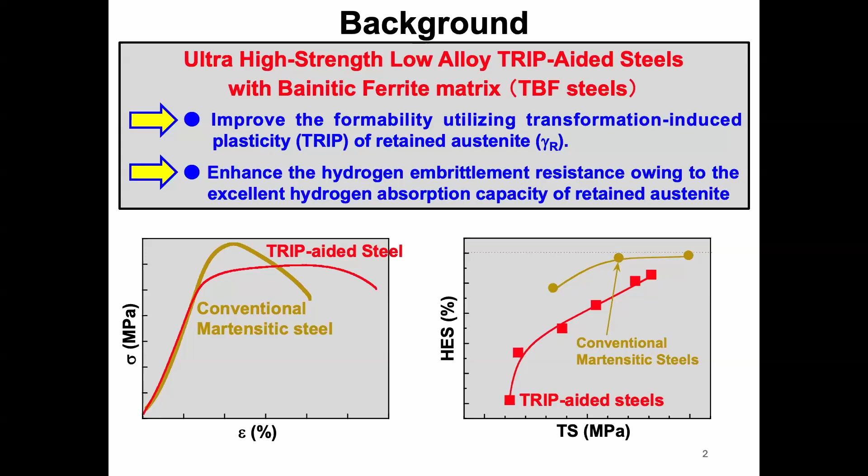To further improve the hydrogen embrittlement resistance of ultra-high strength low-alloy TRIP-aided steels, it is expected to add alloying elements to the TRIP-aided steel to refine the microstructure, to enhance the hardenability, and to precipitate carbides acting as hydrogen trapping sites. Also, addition of alloying elements is expected to improve the retained austenite characteristics of the TRIP-aided steels owing to the transformation-induced plasticity effect and absorption of hydrogen.

About the previous report, in the TRIP-aided martensitic steels, TM steels, microalloyed TM steels decrease the hydrogen embrittlement susceptibility. So it is expected that the hydrogen embrittlement resistance may be enhanced by the partial replacement of martensite with bainitic ferrite, because bainite or bainitic ferrite possesses excellent resistance to hydrogen embrittlement.

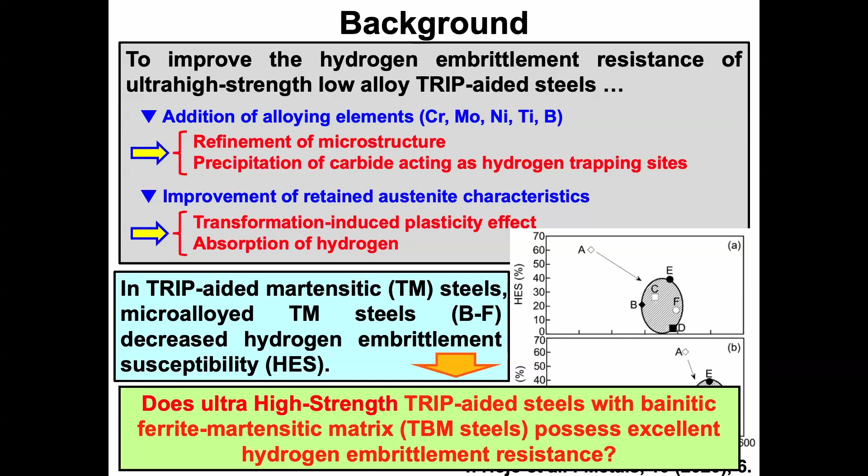So in this study, to develop ultra-high strength automotive frame parts with tensile strength of more than 1180 megapascal, the effect of alloying elements on hydrogen embrittlement properties of ultra-high strength TRIP-aided bainitic ferrite martensite, TBM, steels is investigated.

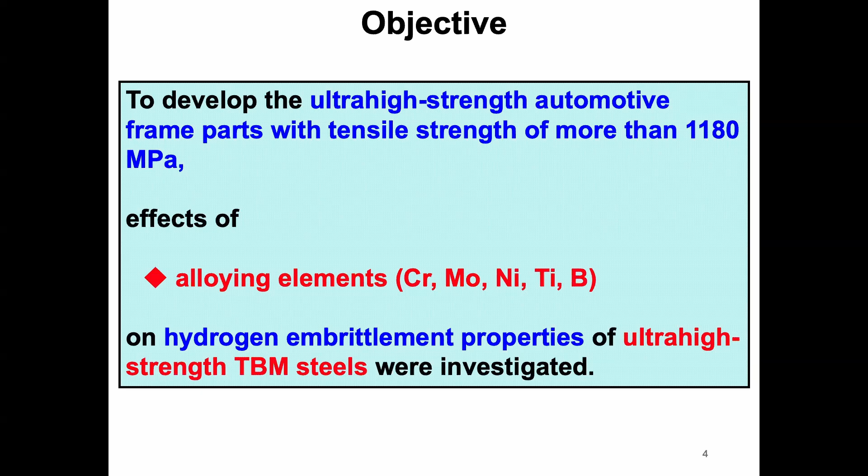Next, I'm going to describe the experimental procedure. In this study, 6 kinds of steels with chemical compositions as shown in this table are used. Steel A was the base steel, and titanium, boron, chromium, chromium-molybdenum, and nickel-chromium-molybdenum were added to steels B to F.

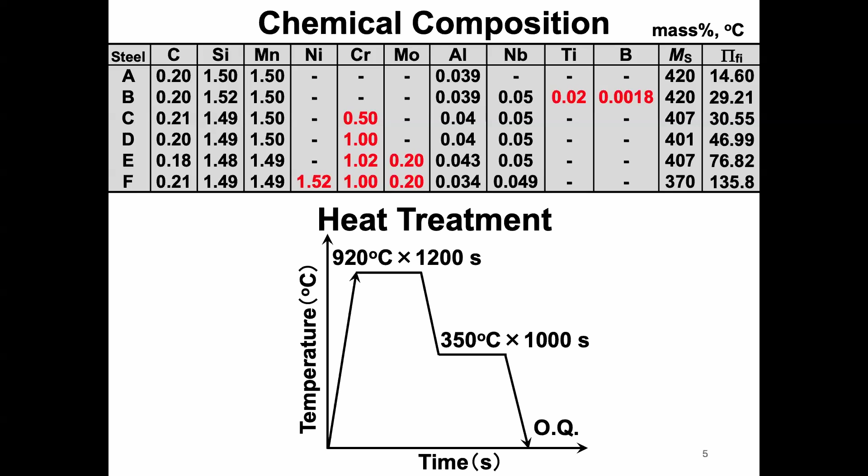Heat treatment was conducted by annealing at 920 degrees Celsius for 1200 seconds, followed by isothermal transformation treatment at 350 degrees Celsius for 1000 seconds to produce a TBM steel. Tensile tests are conducted using a tensile specimen with dimensions of 15 millimeter in gauge length, 6 millimeter in width, and 1.2 millimeter in thickness at a strain rate of 8.33 × 10^-4 per second.

Hydrogen embrittlement properties are evaluated by the hydrogen embrittlement susceptibility, HES, using this equation, in which epsilon 0 and epsilon 1 denote total elongation without and with hydrogen. The hydrogen charging was conducted by means of cathodic charging using a solution containing 3% sodium chloride and 3 gram per liter ammonium thiocyanate at a current density of 10 ampere per square meter at 25 degrees Celsius for 48 hours before the tensile test.

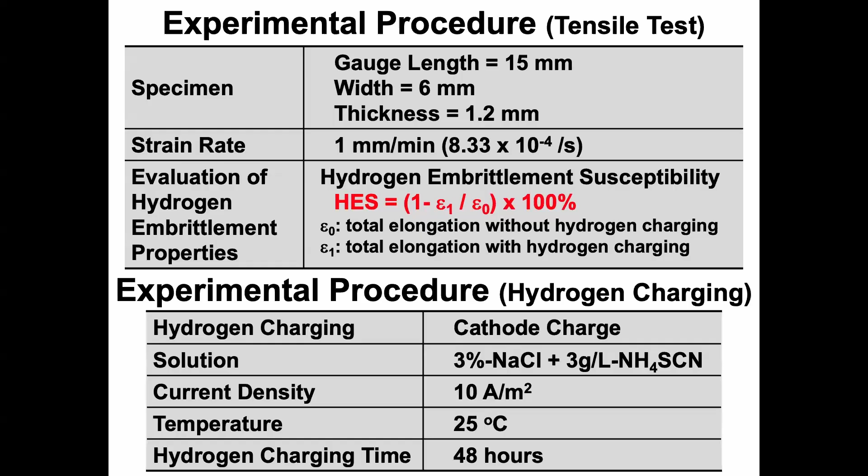Next, I'm going to show you the results. This figure shows the microstructure of TBM steels. The microstructure of steel A consisted of a bainitic ferrite and martensite matrix with a grain diameter of approximately 20 micrometer and retained austenite. On the other hand, in the microalloyed TBM steels, a fine bainitic ferrite and martensite matrix was observed. Although we could not distinguish the bainitic ferrite and martensite, the amount of martensite increased by the addition of alloying elements.

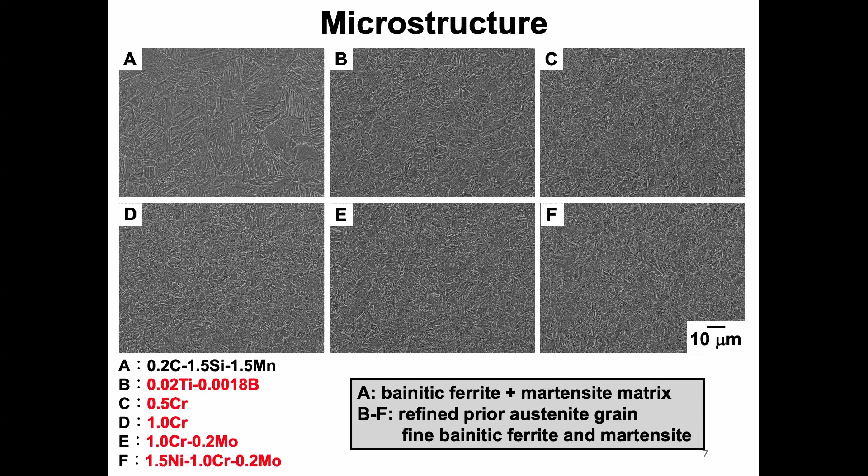This figure shows the tensile properties and retained austenite characteristics of the TBM steels. The tensile strength increased, whereas total elongation slightly decreased by the addition of alloying elements. Volume fraction of retained austenite increased, and its carbon concentration decreased in steels D, E, and F.

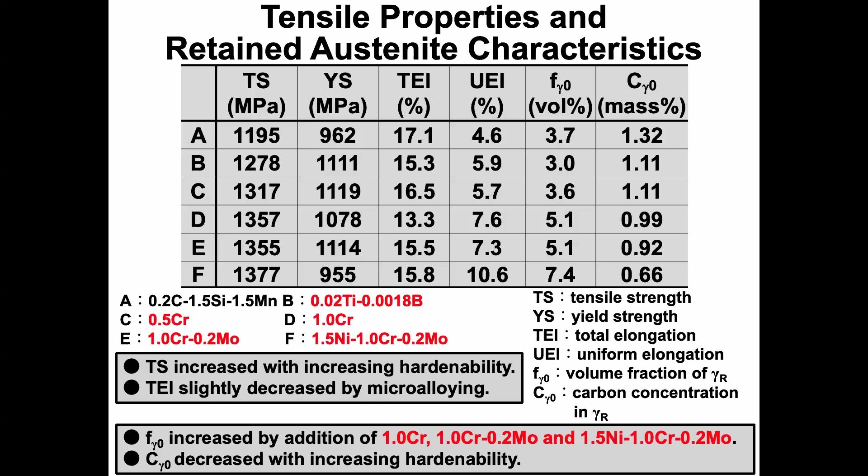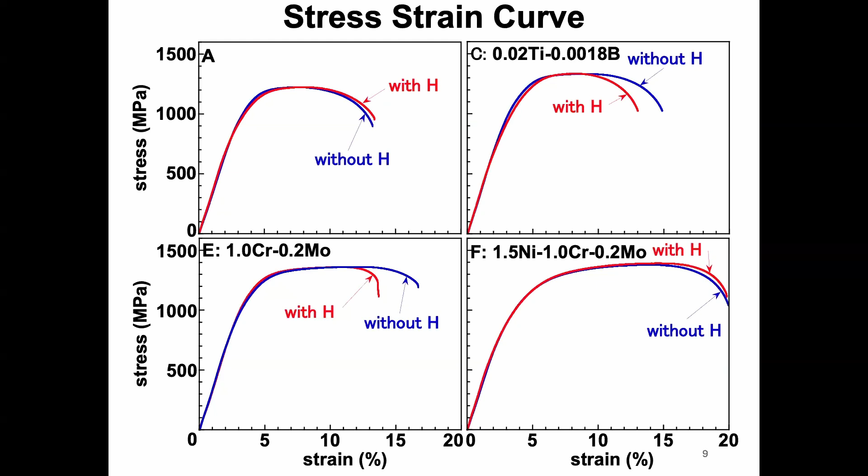This figure shows the relationship between hydrogen embrittlement susceptibility, HES, and tensile strength, yield strength, and elastic limit. The hydrogen embrittlement susceptibility increased by the addition of alloying elements, and HES increases with increasing tensile strength and elastic limit. In addition, HES significantly increased when yield strength exceeded 1100 megapascal.

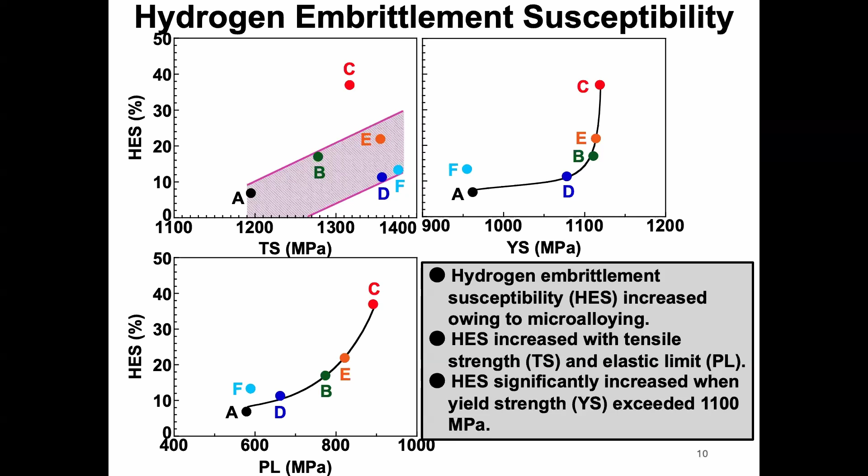These figures show the hydrogen desorption curves and the relationship between hydrogen concentration and volume fraction of retained austenite in the TBM steels. The hydrogen concentrations calculated from the hydrogen desorption curves are also shown in the table. The hydrogen was desorbed at temperatures between room temperature and around 150 degrees Celsius, and the peak temperature was approximately 50 degrees Celsius. Alloying element addition increased the peak temperature, and a high amount of desorbed hydrogen was observed in the TBM steels with alloying elements.

From the right-hand side graph, we can see that hydrogen concentration increased with increasing volume fraction of retained austenite. This result suggests that a large amount of hydrogen is trapped in or around retained austenite.

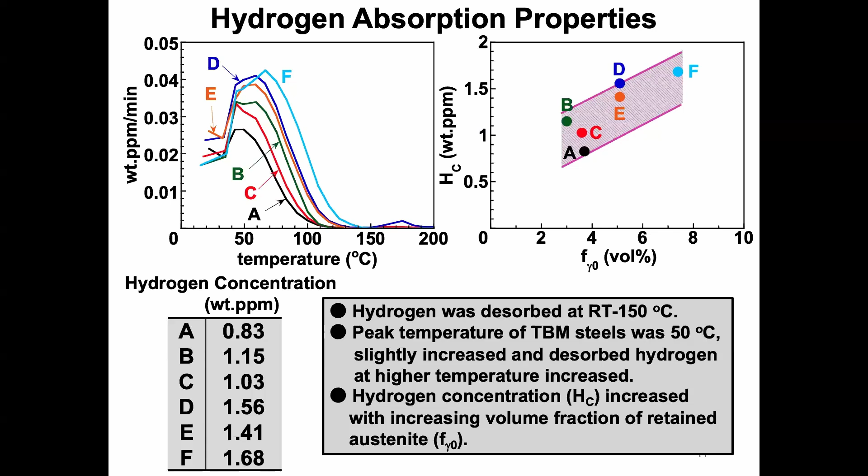Next, these figures show the relationship between hydrogen embrittlement susceptibility and retained austenite characteristics, such as volume fraction of retained austenite, carbon concentration in retained austenite, and total carbon content in retained austenite. You can see that HES decreased with increasing carbon concentration in retained austenite. However, significant tendencies are not observed in the volume fraction of retained austenite and the total carbon content in retained austenite.

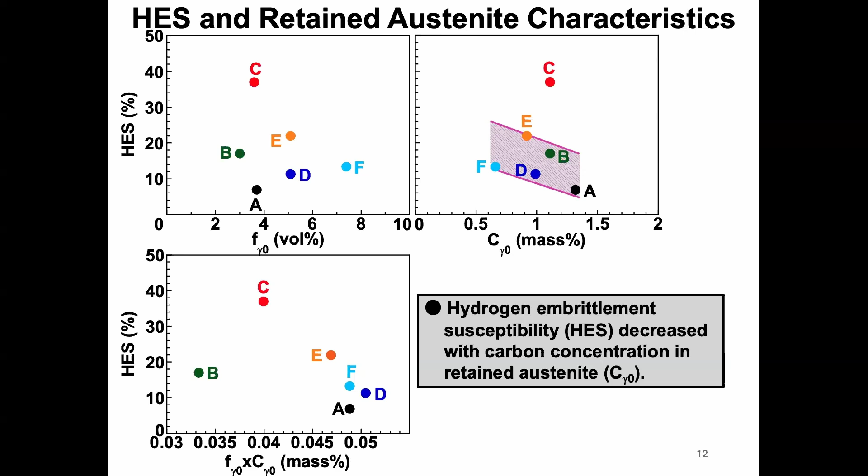Carbon concentration corresponds to the stability of retained austenite. Therefore, high carbon concentration gives high stability of retained austenite, and retained austenite transforms to martensite in the later stage of the tensile test. In our previous report, when the tensile test was conducted with hydrogen, the retained austenite transformed to martensite, and the crack initiated at the transformed martensite. Therefore, crack initiation and propagation was accelerated in the TRIP-aided steels if transformation of retained austenite occurred. Therefore, hydrogen embrittlement resistance of TRIP-aided steel decreased.

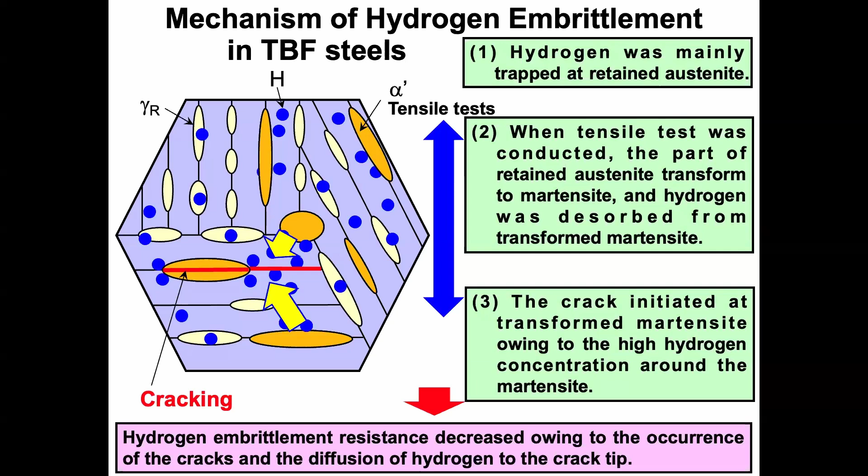The factors affecting hydrogen embrittlement resistance in TRIP-aided steels were strength, microstructure, hydrogen concentration, and stability of retained austenite. In the microalloyed TBM steels, microstructure was refined and volume fraction of retained austenite increased. These factors decrease hydrogen embrittlement susceptibility. However, the strength increased, carbon concentration decreased, and hydrogen concentration increased in the microalloyed TBM steels. These factors increase hydrogen embrittlement susceptibility of the TBM steels. Therefore, these factors simultaneously affect the hydrogen embrittlement susceptibility, and the hydrogen embrittlement susceptibility of the microalloyed TBM steels slightly increased.

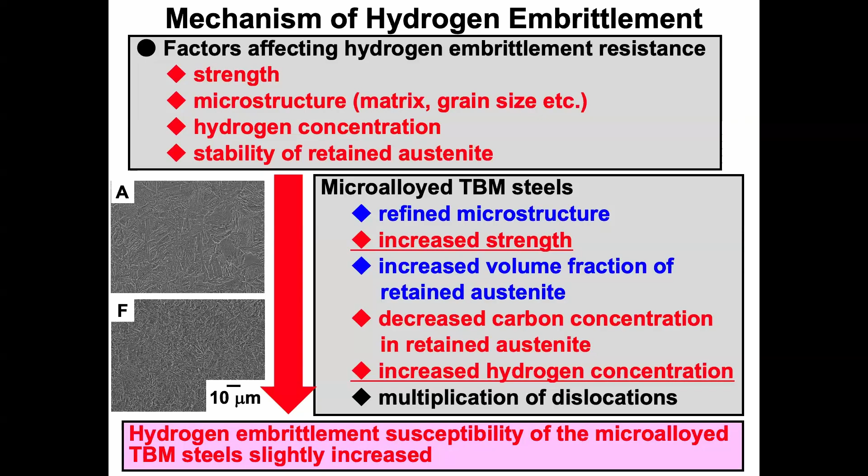The conclusions of this presentation are as follows.